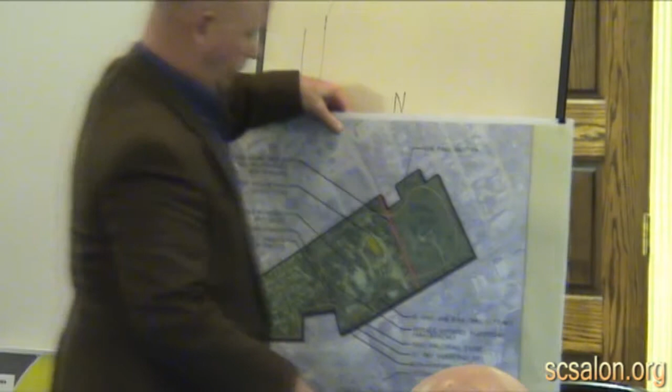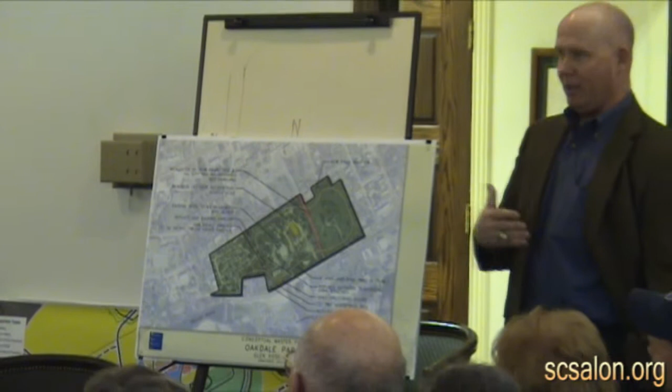What I'll do is briefly run through the elements. My main purpose here tonight was to be here for the public hearing and show the council and the city what we were doing and proposing for the park, keeping in mind this goes back to the process we did in the fall when we updated your park master plan as part of your comprehensive plan.

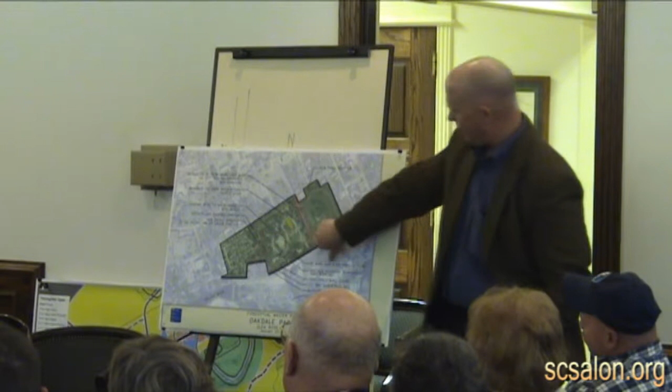There are several elements involved in this. You have new parkland facing the east. The red line is the abandonment of McAllister, and then of course this is Oakdale Park. We need to add this little piece here—my surveyor didn't quite get that down, he thought that was residential property.

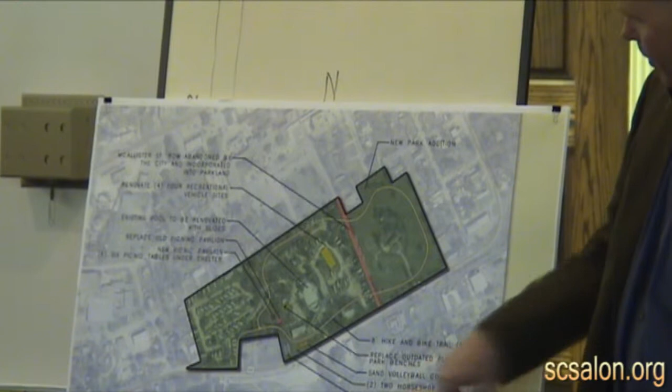What we're proposing is based on the needs assessment and needs analysis we did in the comprehensive plan. We want to put some money into the grant to renovate 4 RV spaces, and we want to renovate the pool by putting a slide there when it's time to do that.

Two picnic pavilions—we would like to remove one of the existing pavilions and replace it with another one. There's been no architectural style done at this point, only that the pavilion would be somewhere in the 30 by 30 foot range. In this grant application, we don't have to detail the final design, but we do have to add the elements and show them on site somewhere.

The plan is so general that the elements don't actually have to go in the exact spot where they're located. What the state wants to see is that you've got the room to at least put them in there. So this is not the final plan, not the final decision. It is, however, a monetary value that will be assigned to these, like for the pavilion.

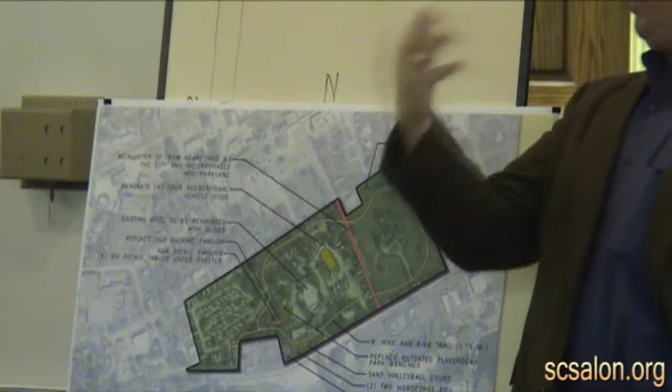I won't go through all the points of what I'm doing to secure the grant, but I can get a few more points when I replace one of the pavilions that needs to be replaced—just tore down, since the attics are gone and it's not really usable anymore. I can also get points by putting in a new one. So I'm putting in 2 new pavilions.

Six picnic tables, 2 park benches, and there would be a small playground that would go basically back into the area where the old playground was. Also a sand volleyball court and a multiple purpose court, which is a small court that would have basketball goals on each end—not a full-size basketball court, but a smaller type court. Those are basically the items that are going to go in here.

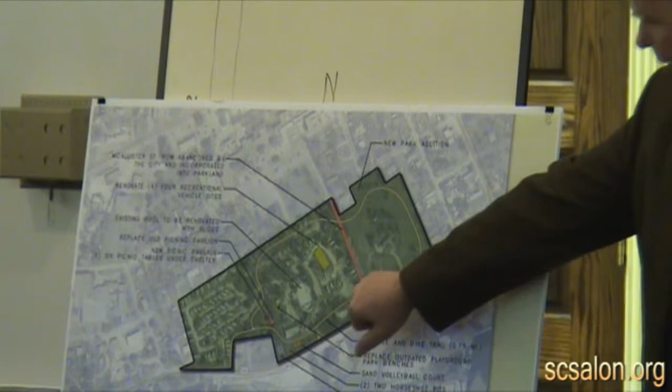The big item, one of the things you can receive points on that I'll talk to you about—and again this is a conceptual line—is the state will award you points if you're able to connect park to parks.

So what I would like to do here is get some points for connecting to this new park. This does not have to be the final outline of the trail that we apply for. As a matter of fact, this particular loop is about three-quarters of a mile long. I will probably cut that back some and still receive my grant funds.

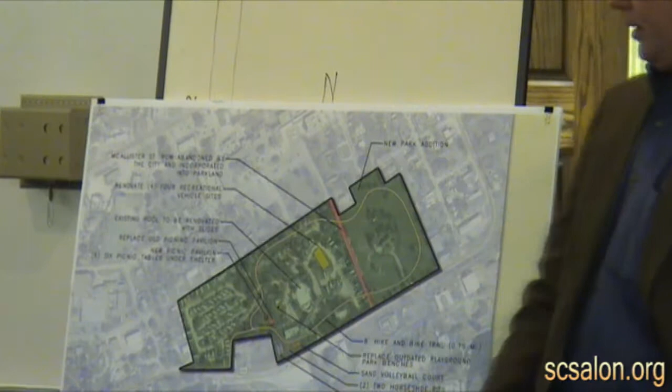But eventually, we think it would be nice to have the trail go along the outside perimeter that would not interfere with your current RV plans, your master plan that you're doing there. The other thing we would like to try to do is cross the highway here, just like you've done down here, and connect to Big Rocks Park, because if I can get to the overlook for the Biloxi River, I can get points there.

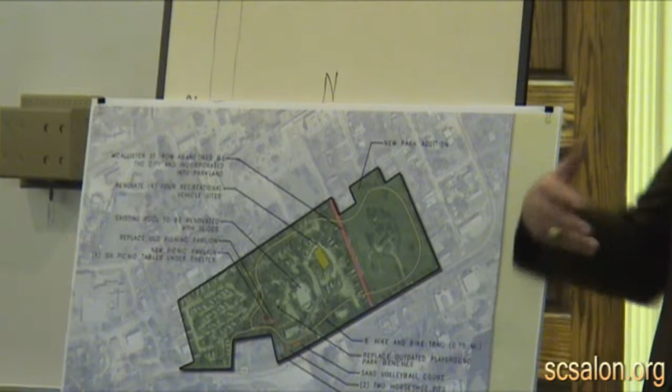So what I'm doing is, based on the comprehensive plan we did, the park master plan, I'm taking these elements and introducing them into this to try to get the maximum amount of money, which is $500,000. If you'll notice, there are no roads, parking lots, or renovation of restrooms. Those detract from your grant.

These are all recreational amenities. I did speak to the state and described your, what I call, it's not really an amphitheater, but your stage, which I like very much. And they said because it's got three walls on it, it's a building. So this is outdoor recreation, but they're going to consider that a building, so I've left that off here as part of the match.

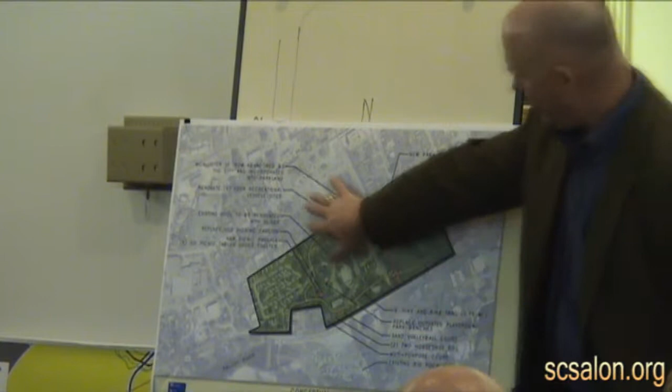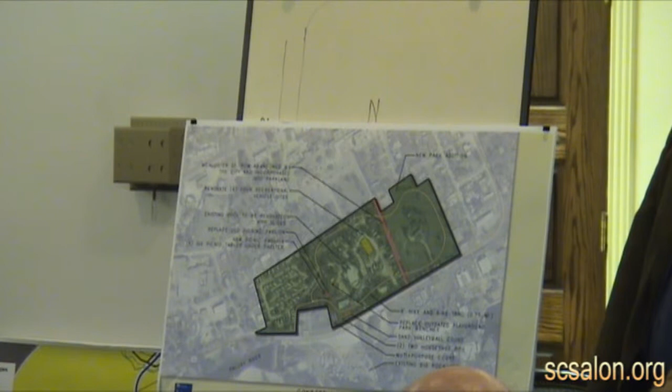My understanding is that you have approximately $1 million for development. I realize there's a lot that's going to go into that. But some of these items, I'm striving to get the $500,000, and some of these items, I think we'll be able to get just about all of those in there with that $500,000 we're talking about, plus the RV spaces.

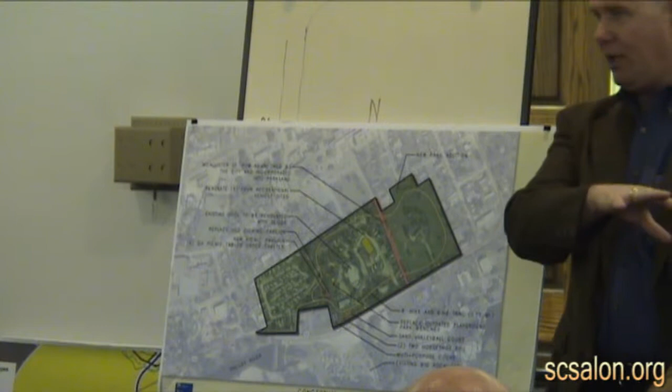There is one item I would like to ask you to consider. When we had our public hearings and were talking about the park master plan for the city, we talked about trails, because trails are always one of the higher uses. In the Biloxi River area, you've got concrete trails, which is absolutely appropriate and should be there. Sometimes in settings like this, we use another material, decomposed granite. They're softer, easier to walk on.

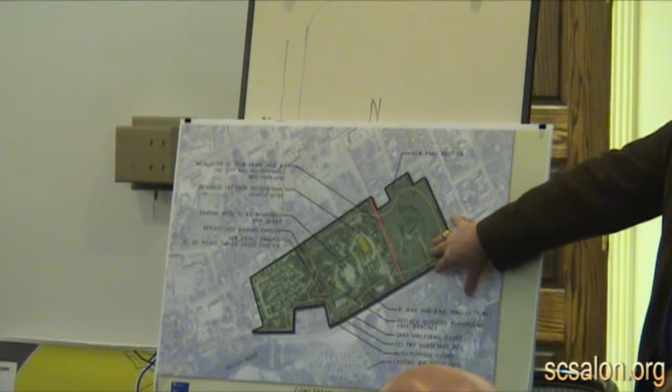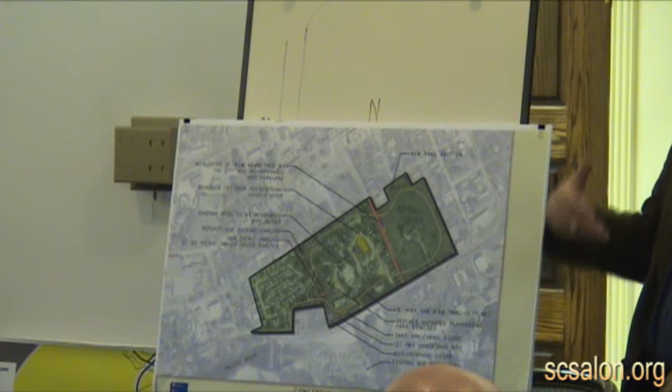I can actually get points for that because it's a recycled material. I wanted to present that option to you tonight to see if you would want to go in that direction. I don't mind using decomposed granite again in these self-contained trails. They are a little more maintenance-wise because of the way they're laid. They're not as durable as concrete, but there's not that much maintenance to them. And it gives you a different texture, a softer walking surface, I think, for an environment like this.

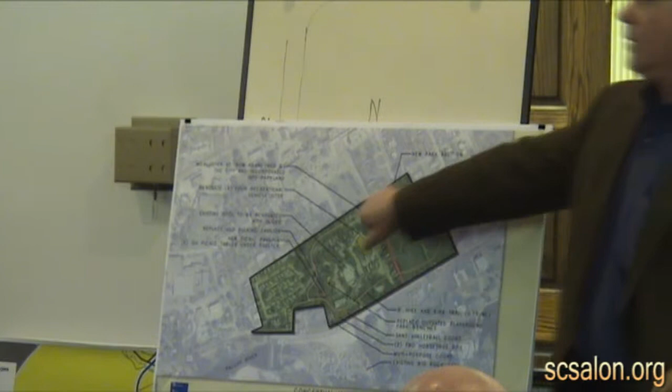Because I could see people, when this is complete and they're parking RVs, strolling on this in the evenings. So would your citizens, I think. Mayor, that's basically the presentation. This is a public hearing to receive comments, and afterwards I can answer any questions, now or then, however you decide. Thank you. Do I have any comments?

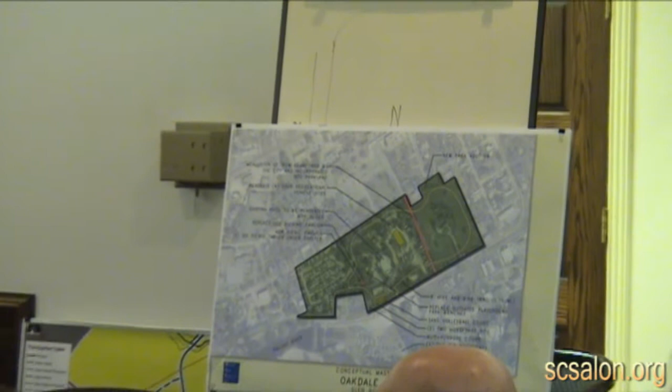The decomposed granite, is that in a gravel form? Yes, it is. It's real finely granulated, kind of a reddish color. The most economical for transport here is the reddish color. If you've ever been to Town Lake in Austin, you've seen those, same thing. I think it would be nice in there, since we're trying to keep the atmosphere as an old park, not a new park. It would add to the feel of it.

And again, I've positioned this plain and simple. It's grantmanship, and it's playing the grant game to try to get the $500,000. That's what we want. How much of that is budgeted in the pool area? Not much, only about $75,000 to $100,000, because I have to take all of these items and make them into a tabular summary to show them what we're spending it on.

That could be the slide. Those vary from $10,000 to $200,000, it all depends on what you want. The point is I'm not calling that specific piece out. I am probably going to allow $50,000 or $75,000 for it.